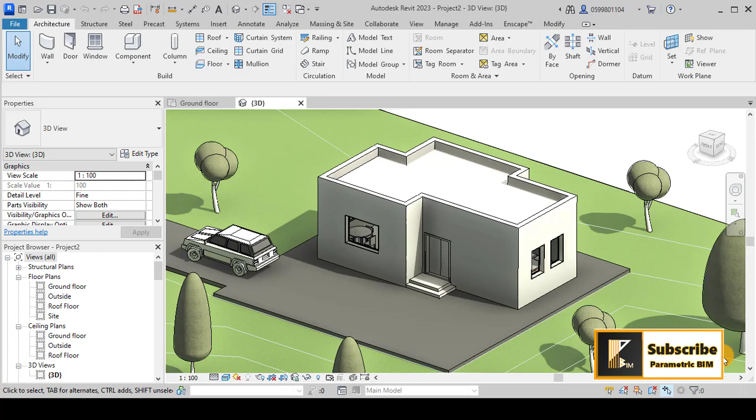Hello everybody, this is Fadi again, and in this tutorial we will learn and continue with this small house. As you remember, in the previous video we have created this small house with the walls, interior walls, and furniture, and also we have learned how to visualize this plan.

So if I am in coarse, it will look like that, and if I turn to fine, it will turn to more detail in the walls and other details that we have in our project.

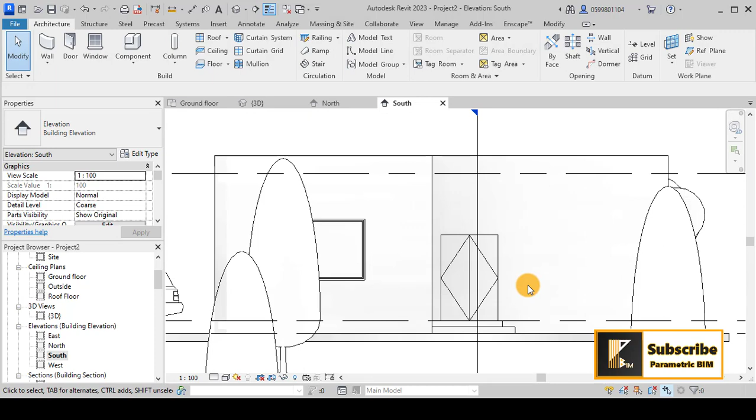So in this tutorial we will learn how to add the stairs, if you remember these. Also in this tutorial we will learn how to create the building pad, or the streets, roads, and also the topography around our project.

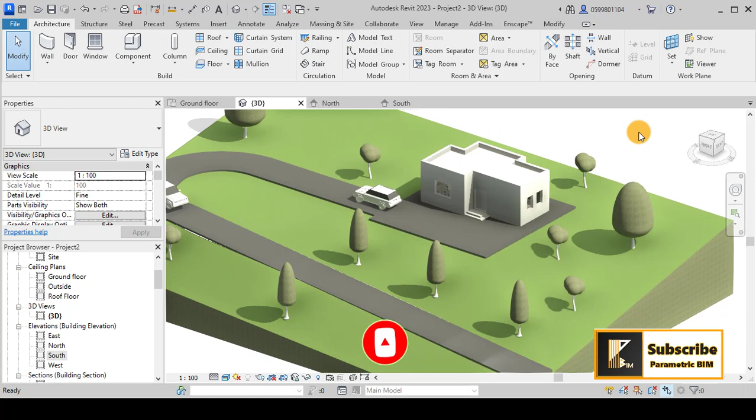So without further additions, let's dive into Revit and see how to continue with this small project.

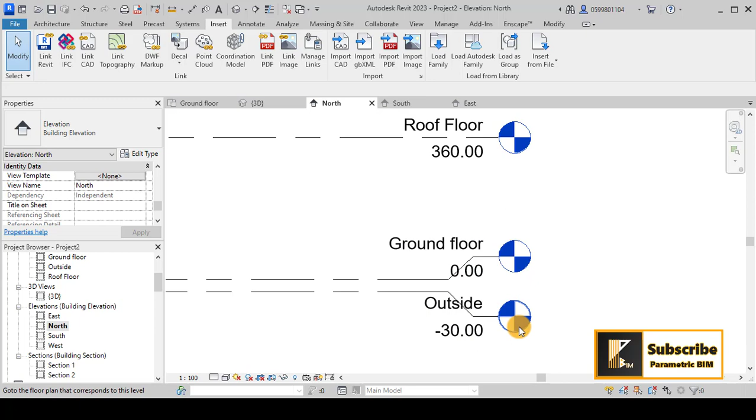So as you see here, I have two stairs maybe at the entrance, as I have two levels with 0 at the level of the home and minus 30. If I go to the elevation, maybe the north, you can see that I have ground floor and the outside level. So in our plan we have two stairs to reach up to the level of our home.

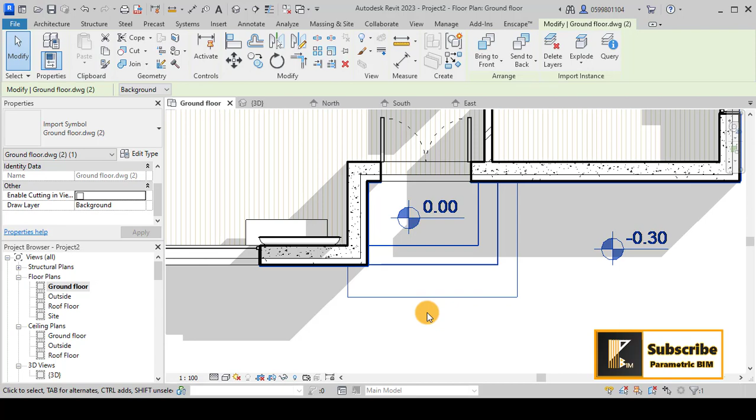And these lines from the CAD file that we have imported into our project template help us continue with this project as guidelines. And also we have two stairs here.

So how can we create these stairs? First of all, I would like to go to Architecture and to Stairs. And also you have two approaches here to create the stair.

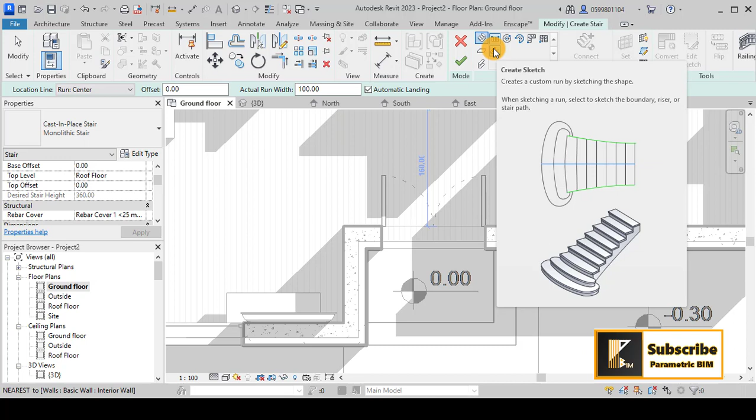Maybe you can create it by sketch, and this is the logic here: you can sketch the boundaries and the risers of these stairs, and then finish this sketch in order to create the stair. Also you have the opportunity to create a run, and then modify this run, and we will go with this approach.

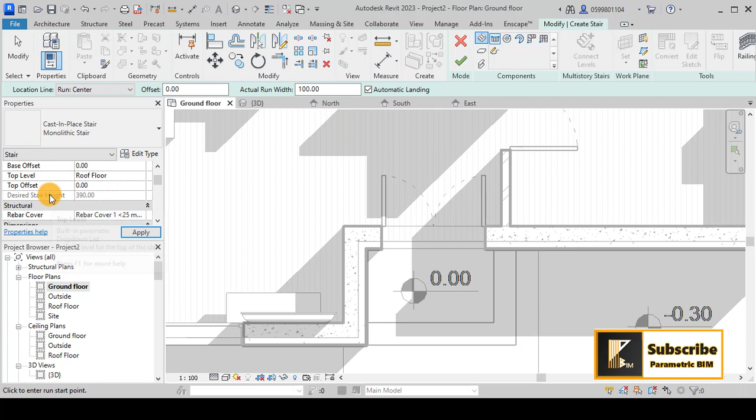So I will select this run and use properties to determine from where to where the stair will be. I will set the base level to outside, and the top level to the ground floor, because the levels go from outside, which is minus 30, to 0, which is the ground floor.

So I will start to draw this stair, and it will give us something like that. But you see that our stair has a custom shape, so simply we can click on the stair, and here above you can convert to sketch.

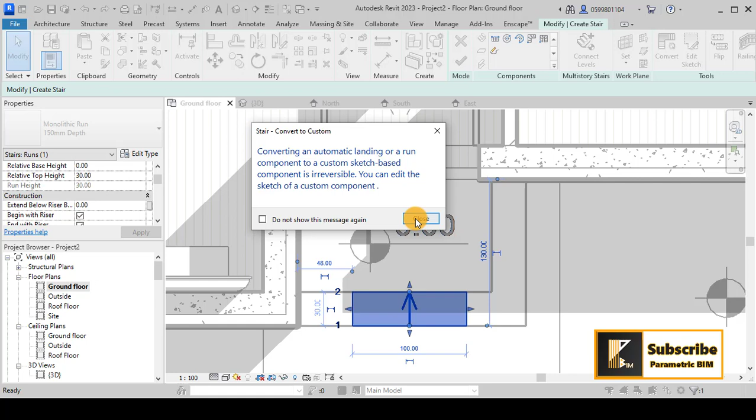This is my preferred approach for making stairs that have not more than 3 or 4 steps. So you will get this message: it's converting an automatic landing. Yes, you close this, and then you go and edit this sketch.

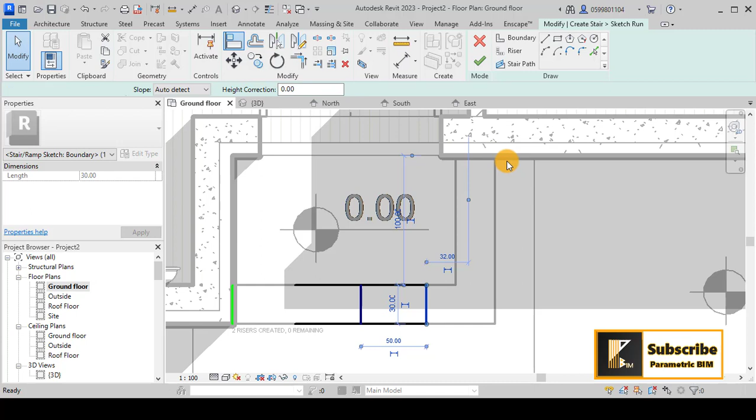If you see, we now have the boundary here, so I will try to drag this to this limit. For this one you can even use the align tool to align this one to that one, but also you can delete it and try to draw your boundaries like that.

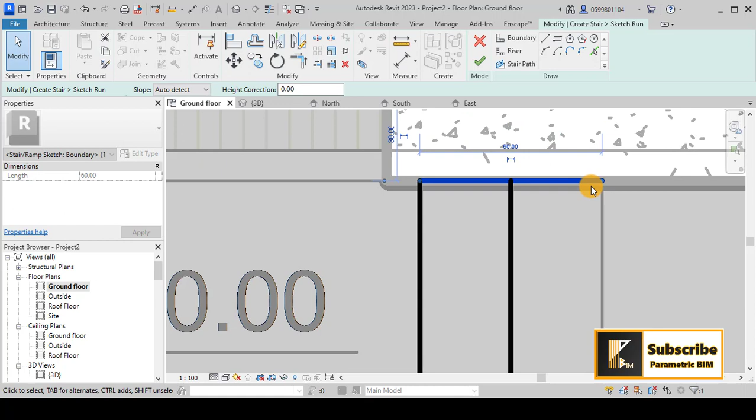Also for the riser, we have vertical risers, so you can go to risers and select these. Maybe the boundary is not here, it will be from here to here, because this line is the cantilever, but we didn't do it.

Okay, now you can trim and extend. I will use this trim and extend to corner to close the riser and the boundaries together like that.

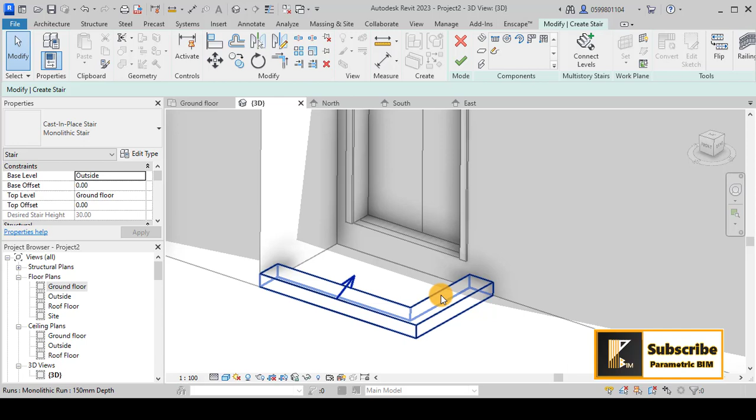And now we have the sketch ready for our first stair here. You can simply click OK and see the result. Maybe in 3D we can see it. Yes, we have one stair, but the other stair will be the landing in this case.

So I will now finish this one and see how to do the landing. You will get this annoying railing; you can simply delete them if you don't want them, and then continue. Now also I will go to select my stair.

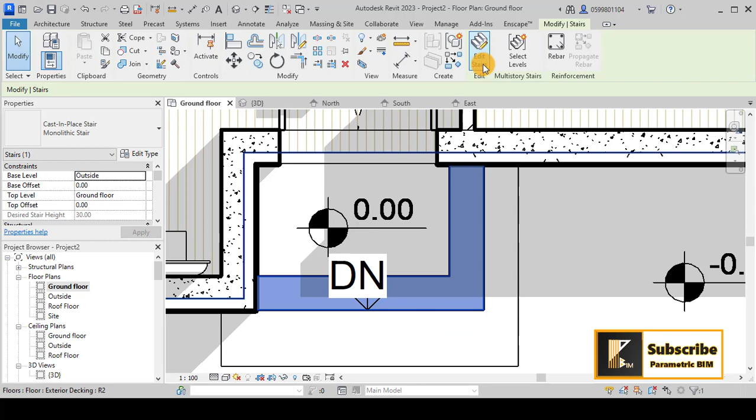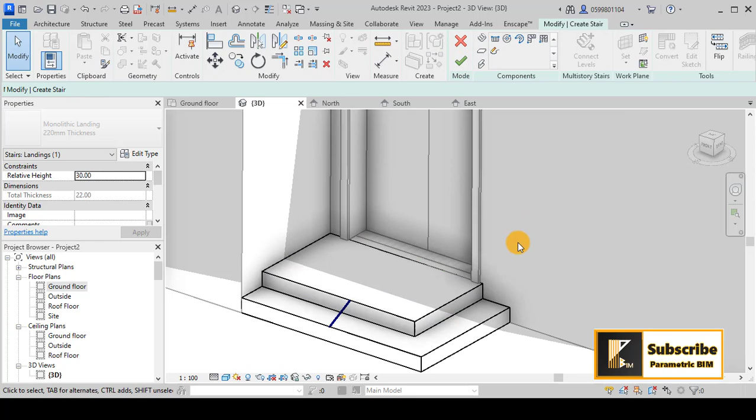I will edit my stair here, and you can see the landing here. So I will sketch my landing because I have a landing here. Once you sketch the landing, your landing will be automatically created like that. Once you hit finish, you will get this result, and this is my approach in creating stairs.

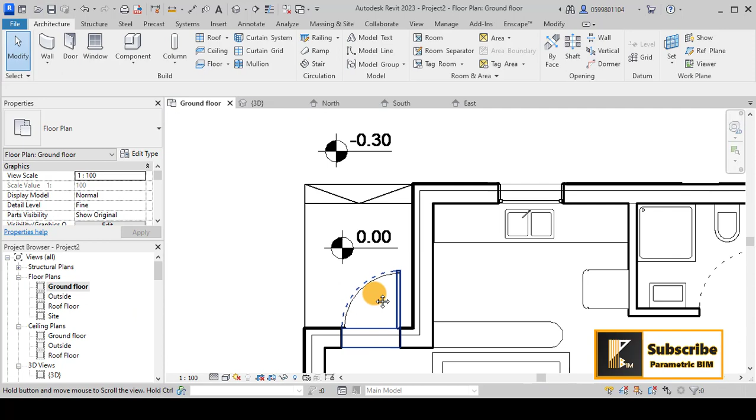If you create a section, you will get a good idea of the result for the stairs. Let's create the other stair on the other side of our home. With the same approach, you can go. Maybe you can also select this stair and create similar ones without any further addition, without going to the options.

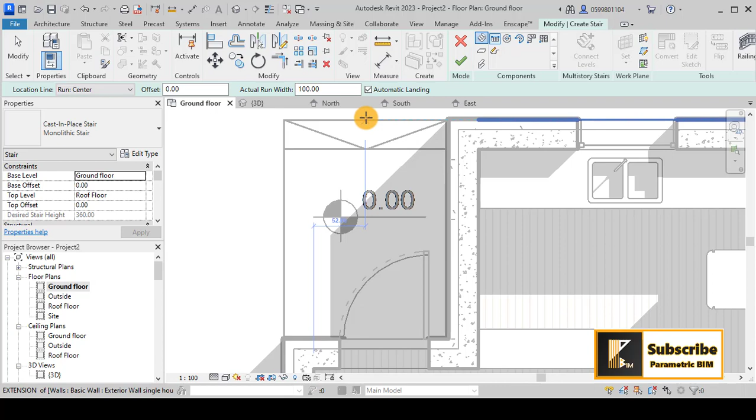So I will use the same approach. I will go to run and try to draw any stair with any type. Maybe you have the opportunity here. There is no need to modify the sketch because it is rectangular.

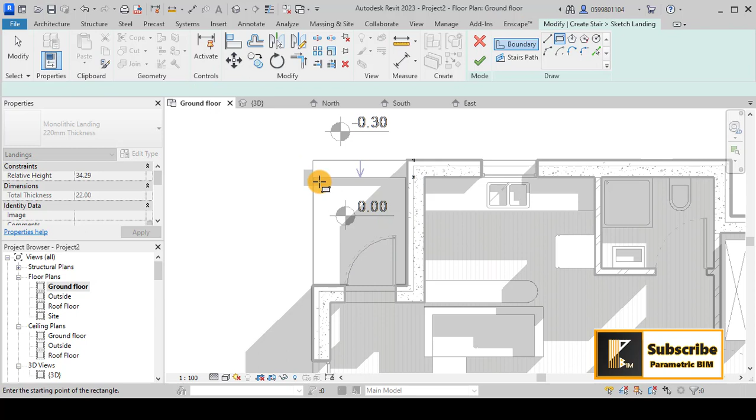So I will now also draw the landing and sketch it. Maybe you can use the rectangular tool here to draw from here to here. You can see now that we have this one. If I click OK, I will get this result. So now we have done with our... maybe we have something wrong here.

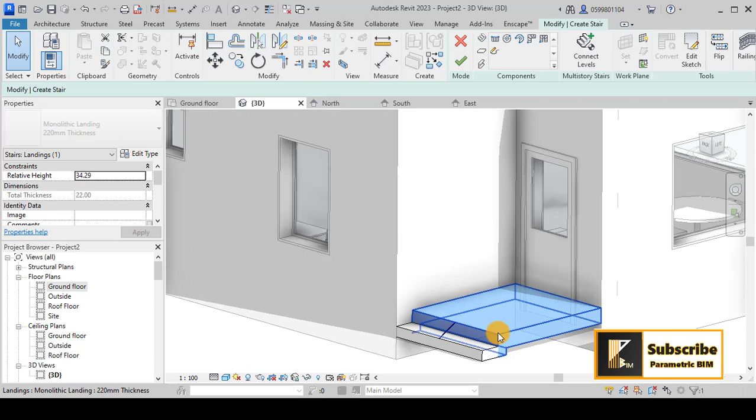I will check now. You can see that if I click on this, I will remove this annoying issue. You can see that the base level is ground floor, but it should be outside, and our top level is ground. So we will adjust that.

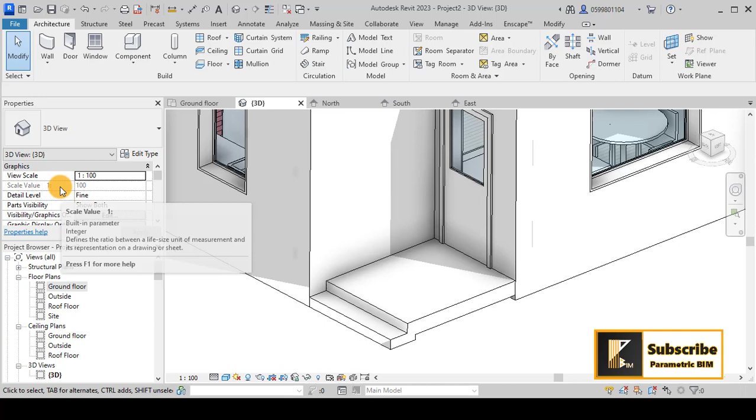Sometimes you can't adjust it like that because you will have some constraints, so you will have to repeat from the beginning and check your properties here, the base level and the top level. So now we have done with our stairs.

Let's try to make some topography now around this house. How can we do that? I will go to site. You have now the opportunity to go to massing and site, and topo surface.

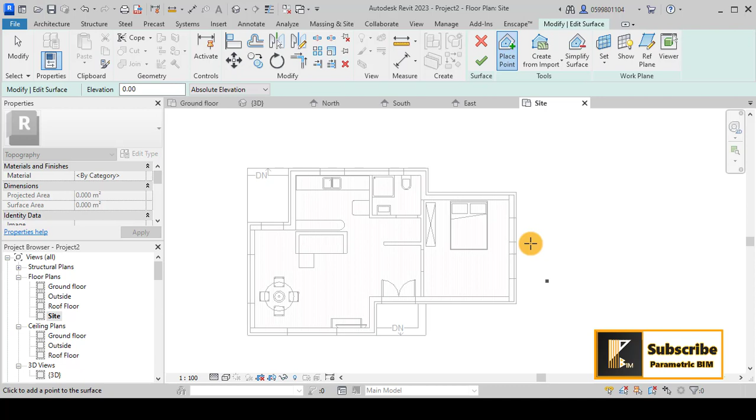By going to the topo surface, it asks us to place points here with elevations in the green tab. Here you can see we are working in centimeters, I think. Maybe. Let's check that. You can press UN and check that the length is centimeter, distance meter. So I will turn to meter, to not be confused. I'm usually working in meter.

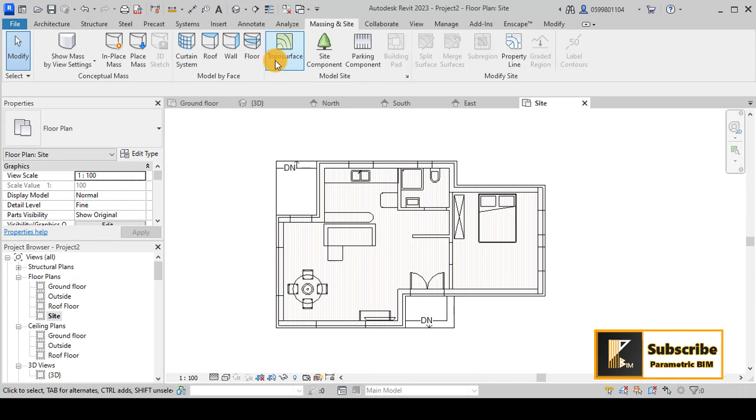It's up to you. Yes, going to topo surface again, and then I will try to put some points. If you remember, we are at -0.3 around this side, so maybe we can go with -0.3 all around. Let's put some points here. Maybe you can move this in order to create a larger site.

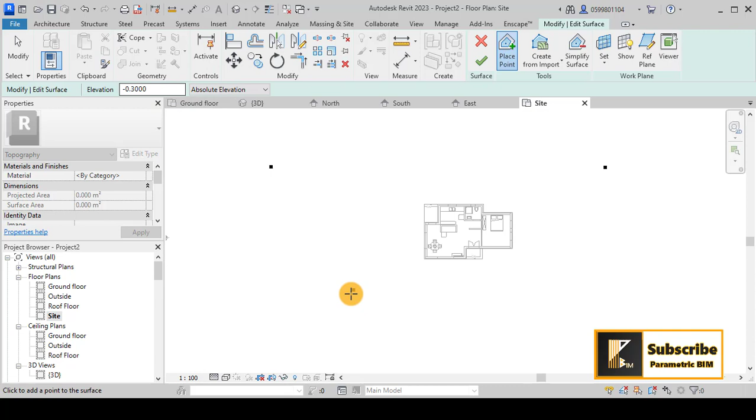Also I will go with -0.3 here, and then I will go with, let's say, 1, like that. Maybe we can go with -5. Sorry, for these two I will use -1.

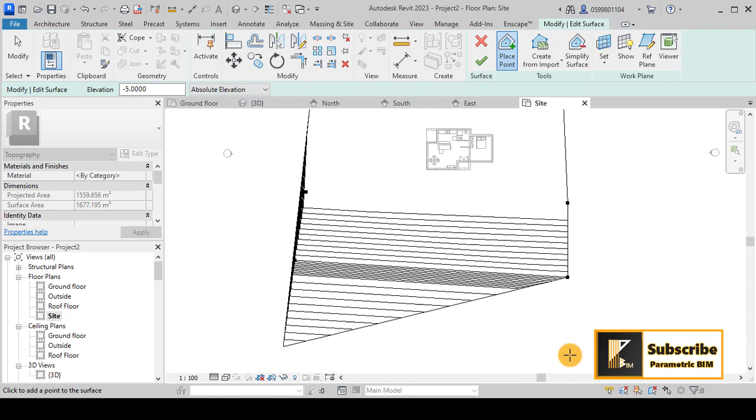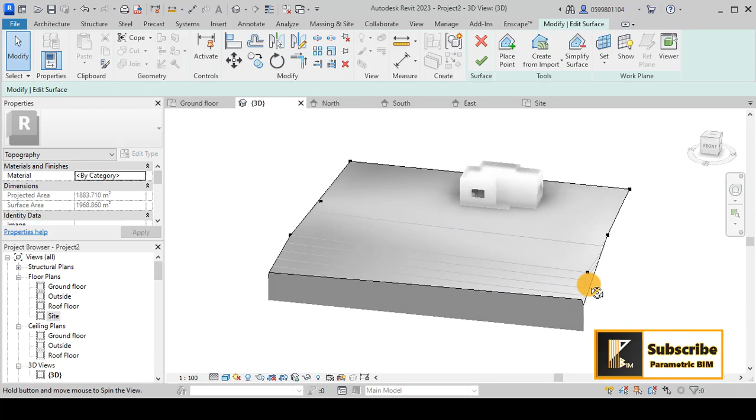Yes, it will not appear because maybe we have some properties here in the view template. Anyway, you can see in the 3D that we have this site. Maybe you can now play with this site in order to get what you want. So I will click OK and see what we have.

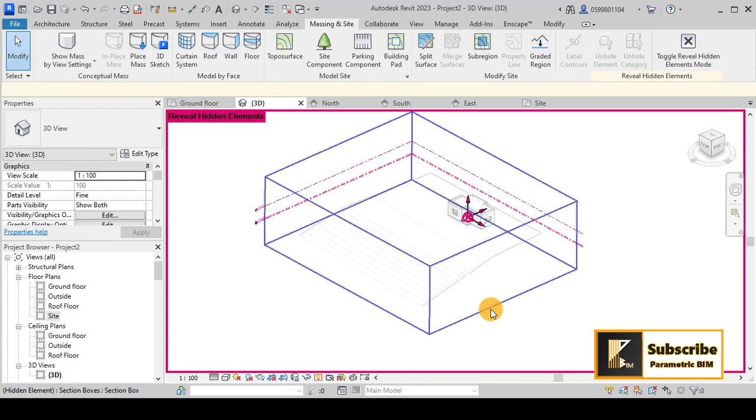Maybe I think the problem is with the section box, because we have hidden it. Maybe like that. You can even unhide this element and then see the result. You can now uncheck the section box in the properties to get the topography shown here in your site. So maybe you can play now and edit this surface.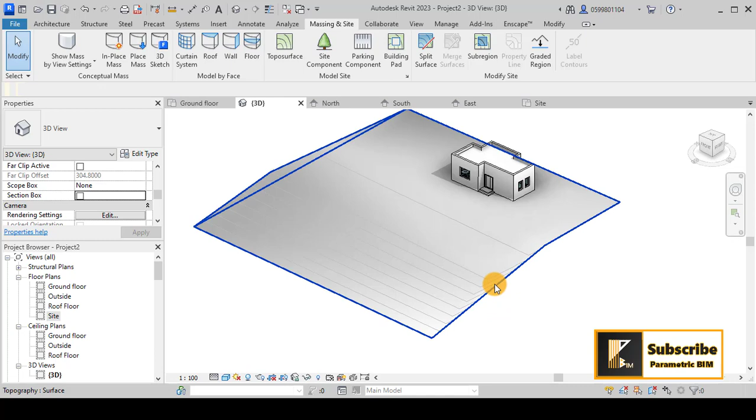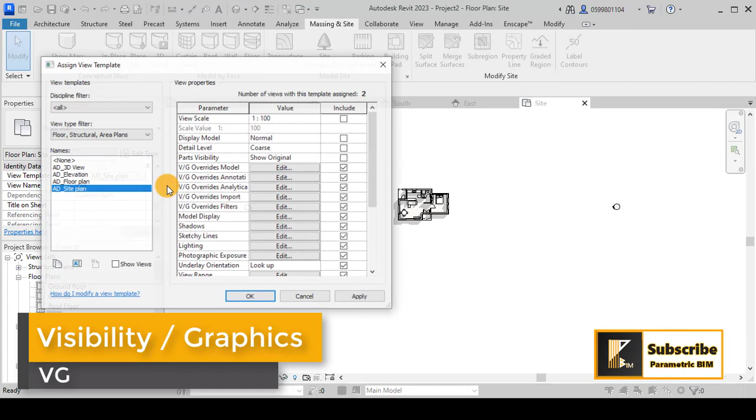Maybe let's say that we have... I don't know why it doesn't appear here. Let's check the view template. We have none here. Let's say we will go to that. Yes, I think with visibility and graphics, we can now play with that to show the topography.

Let's go to model category and go all the way below. You can see that the topography is not appearing. Check this, and now you will have this result that will show you the topography in your project. Let's make some modifications.

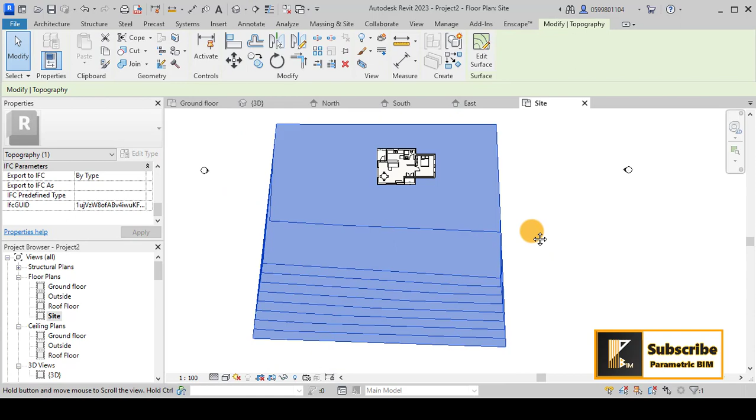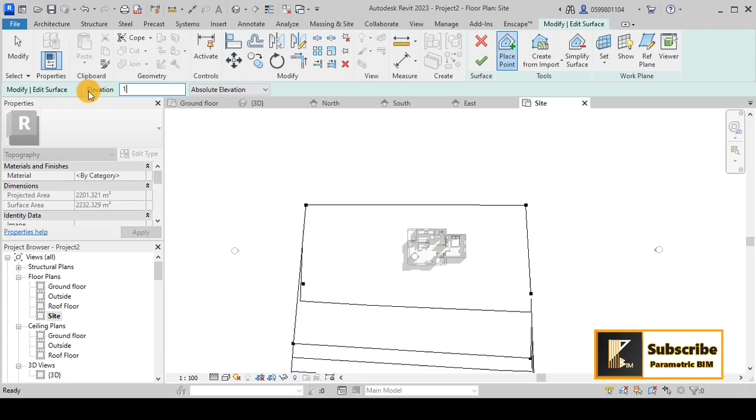I think it's very deep here. Maybe we can make something like that. Let's give -1 here to give some depth, for example, like that. I think we have one here, so you can play with that. Anyway, you can play with your topography. I think we can adjust it like that and like that.

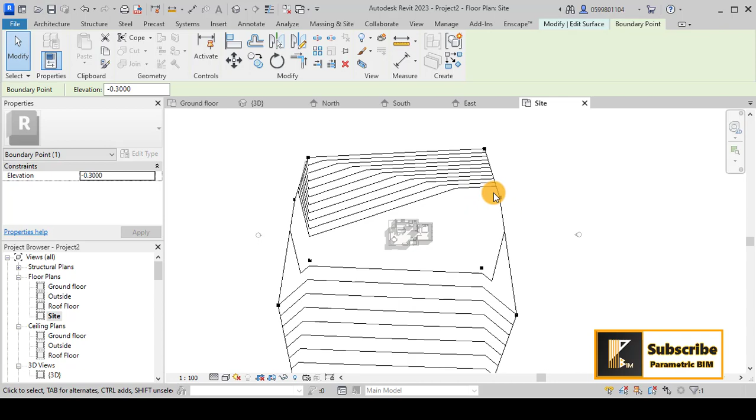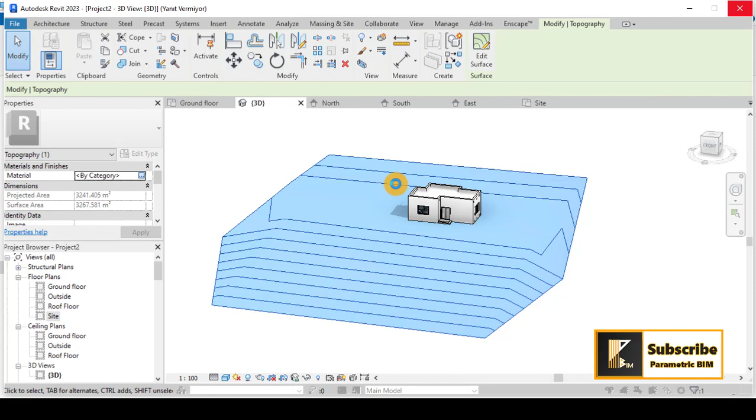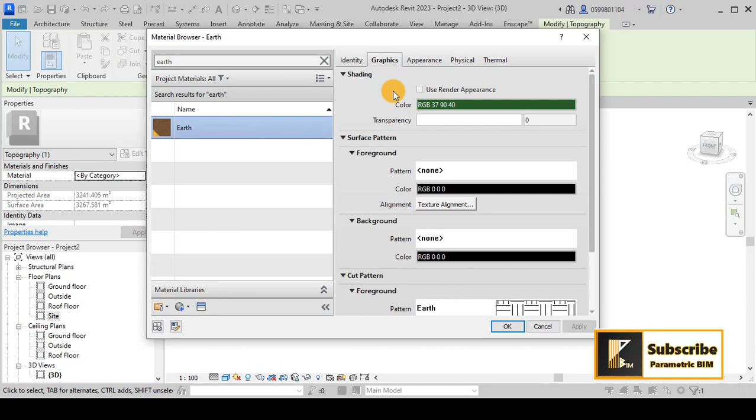Okay, let's say that this is good for us. Some slope. And if you want to change the properties of this topography, you can do that by clicking here and going to the material, and change the material to whatever you want. Maybe we can change it to some green here in order to have the same properties of what we had in the previous video. We can now give, for example, earth for this topography, and for the graphics you can use maybe some green like that.

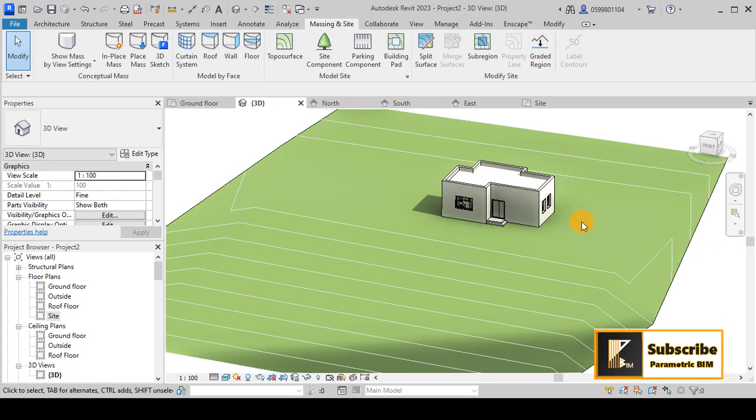Okay, you will get this green color. Maybe you can go to realistic and show that in a good mood. Now we will learn how to create the building pad or some streets if you have them in your project. So I will go now to the site, and now you can go and create, let's say, the floor around this house.

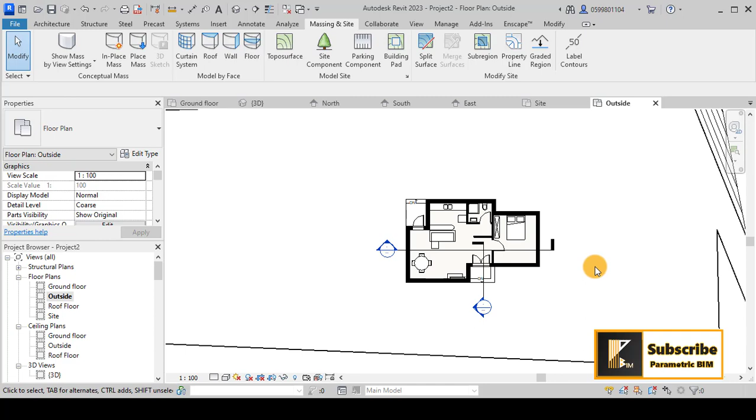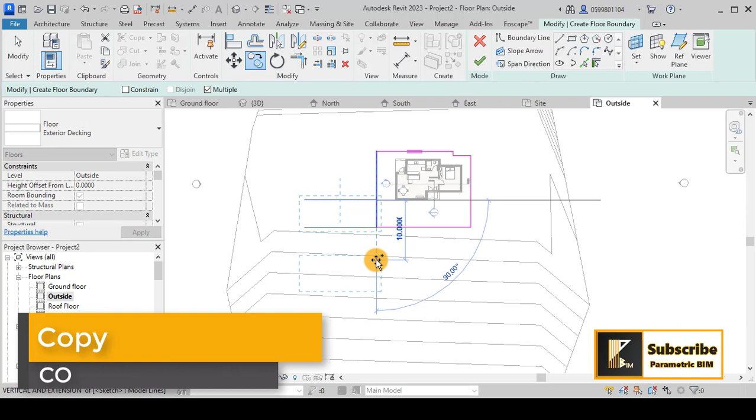So I will go to the outside. Maybe you can now go to architecture, floor, and try making some offsets here like that. Anyway, maybe we can put some cars in front of that. And also I will go in the same one and create some road here, maybe like that, and go with this semicircle, or let's make a copy of these with a certain distance here. The distance you can play with.

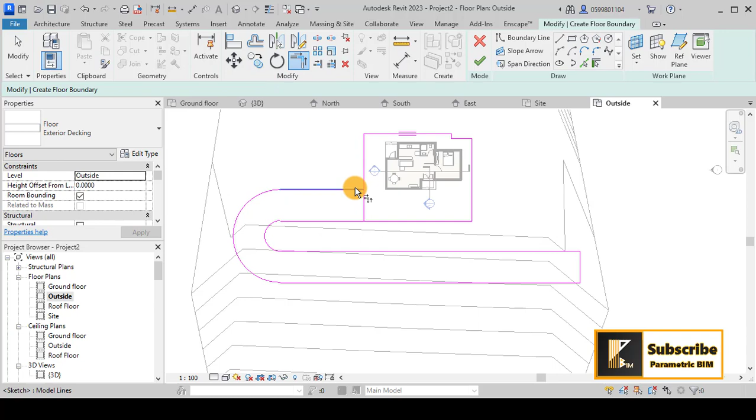I think you will work on the site plan in this case. Maybe make some turning here. Yes, like that. I can choose that and go all the way like that. Anyway, you can close it here and then try to trim and extend these floors. It is just for showing you. So as you see here, I have these.

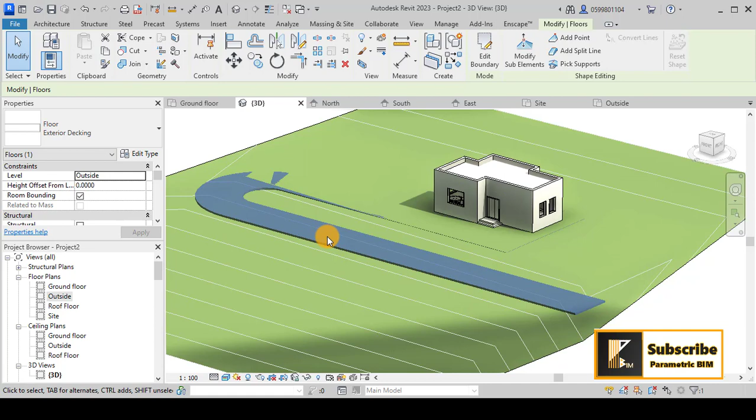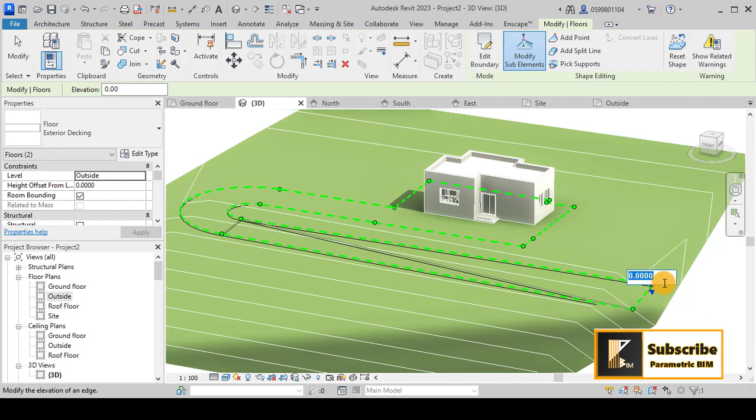So how can we adjust this topography in order to be with these roads? Maybe also you can play with the slope of this road, and I will show you how. If you want to make some modification of that, you will go to modify sub elements, select the floor and then modify that. So I will go to these points. For example, maybe we can put -1, no problem for this message, and also -1 here. I think we make some slope for these roads.

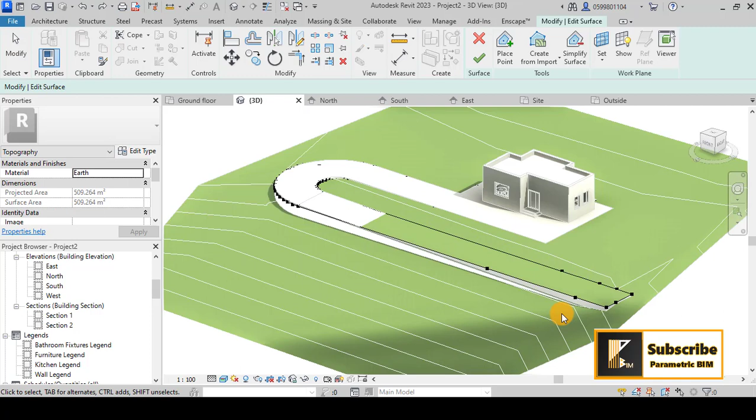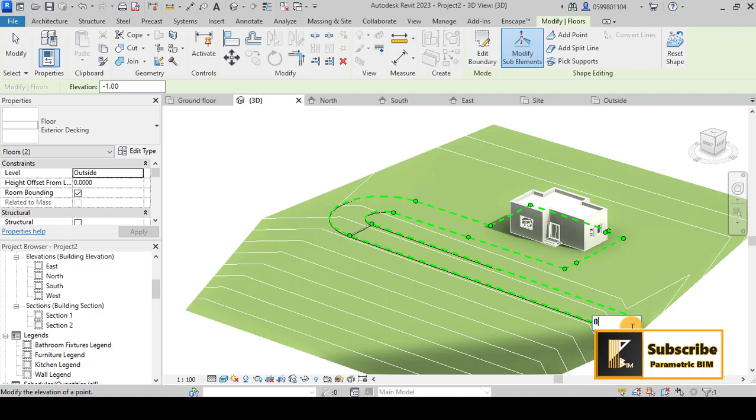Okay, this is the first point that I want to show you, but in this tutorial I will go back with the flat road, and I will show you how you can adjust the topography to your road, and then you will get the point. So I will click Ctrl Z to go with the flat, maybe something like that. I don't know what is happening here. Okay, let's click finish and see what's happening. Yes, I will click OK and then try to make this 0. And for the other one I think we have to zoom here, click on that and give it 0. Yes, we get this flat road.

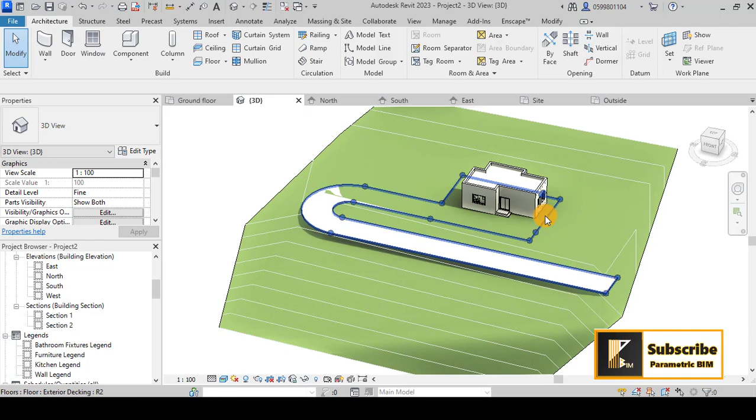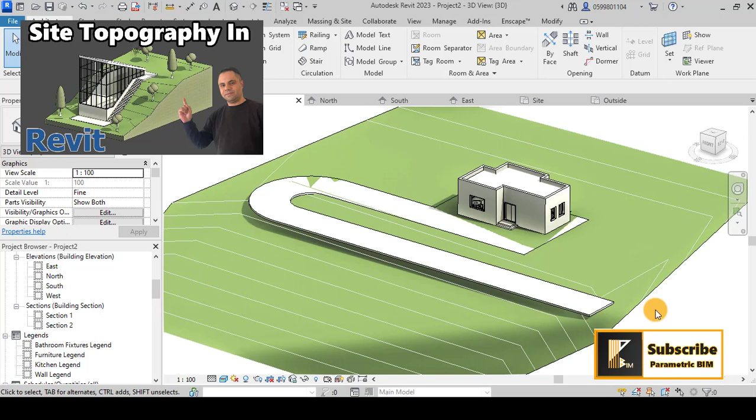So now what is the procedure to adjust our topography to these roads or floors that we have? We didn't make a pad here because we don't have a basement or something like that. Maybe in next videos we can show it, and I showed you that in a previous video, which is the Topo Surface tool. You can check it out in our channel. Now let's see how we can adjust this topography.

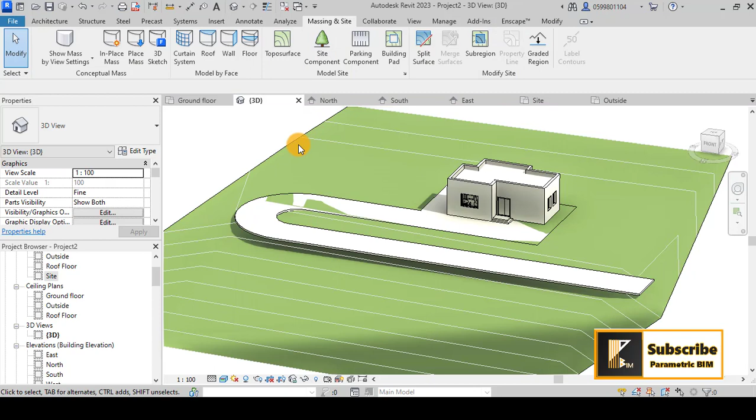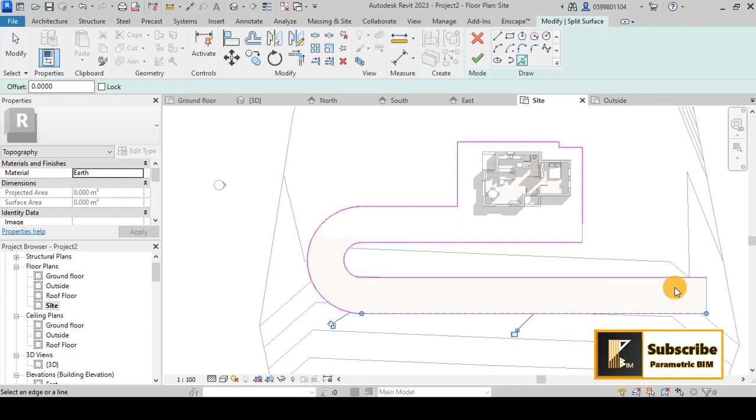I will click now on the topography that we have created. I think we went back a lot, so I will go to massing and site and split this surface. Then I will go to the site. Okay, I will repeat the process a lot faster. Okay, now we split the surface. So I will choose now the surface that we have split. Yes, this one. And then I will go to edit surface.

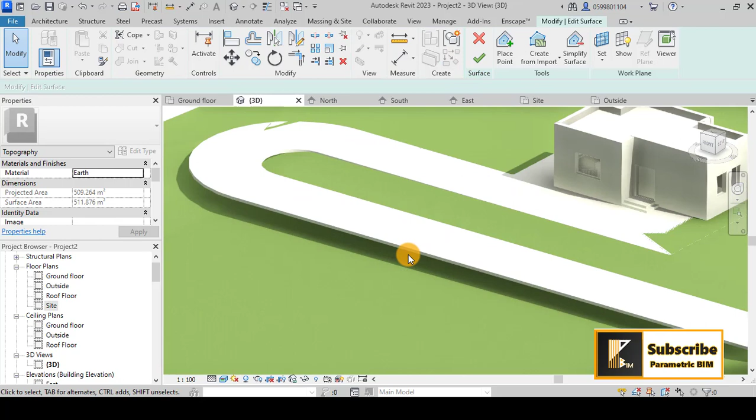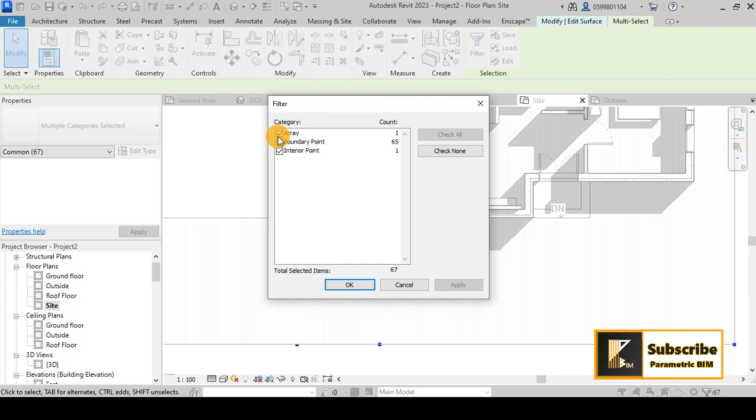Now we know that our floor thickness is 20 centimeters, so from the site you can choose all the points, and then I will go with the elevation, but here we have selected something like that. I will go to filter and uncheck the array. This is the array of the table, if you remember, and then for the elevation I will go with minus 0.5.

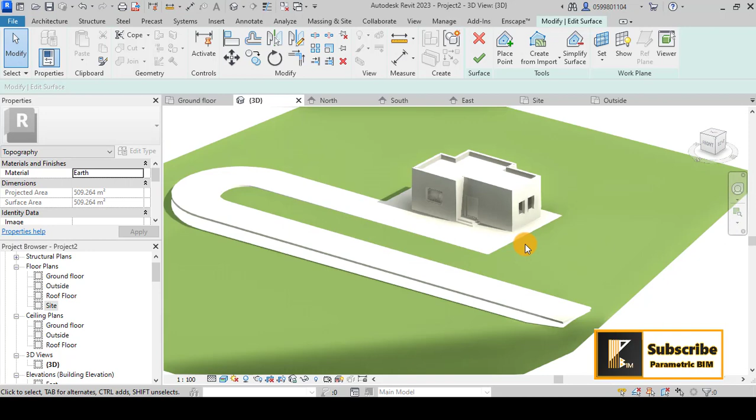Why minus 0.5? Because I want the surface to be a little bit below, let's say, the ground. So now we have adjusted the first one, which is the split one. Maybe you can also remove it, but in order for it to appear in the section you have to leave it.

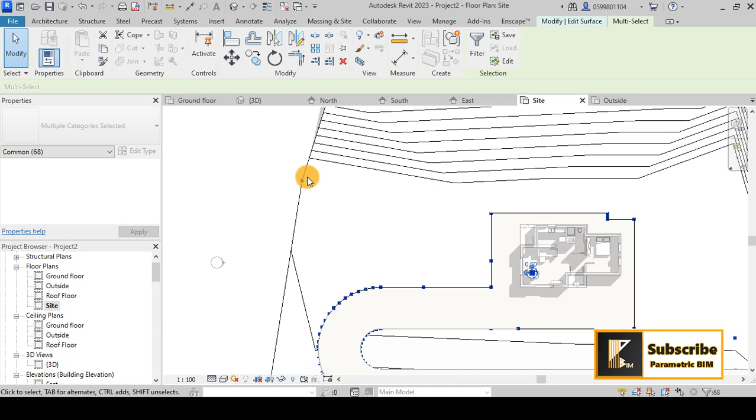So I will finish now, and for the other one we also have to select Edit Surface and then go to the site. Let's also choose all of these. Maybe some of them will be chosen that we don't want, so there is no problem. You can go to Filter, check none, and check the boundary points only, not the interior points. You can click OK, but this sometimes doesn't work,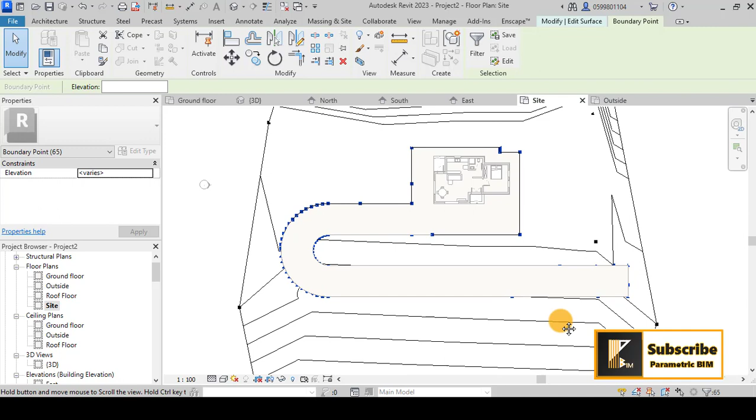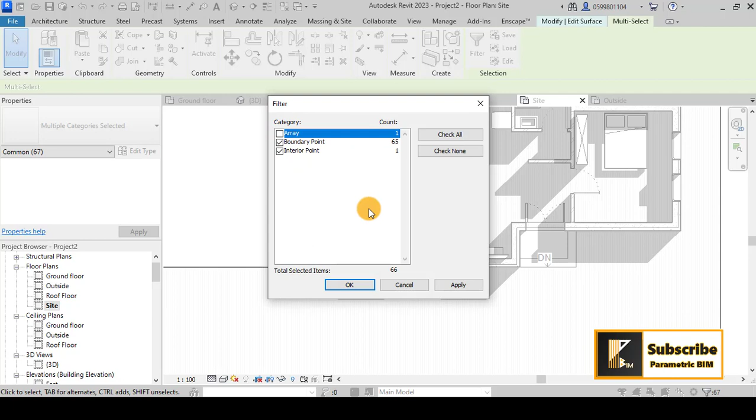so you have to make sure that you have selected just the boundaries like that, which are the boundary points between the surface and the road. So I will go one more time to the site and try to select that. The array will also be selected, uncheck that, and click OK. We have these points. I will also give the elevation minus 0.5.

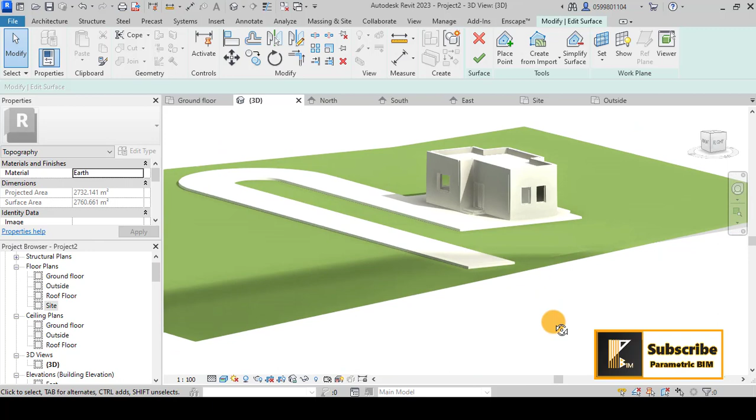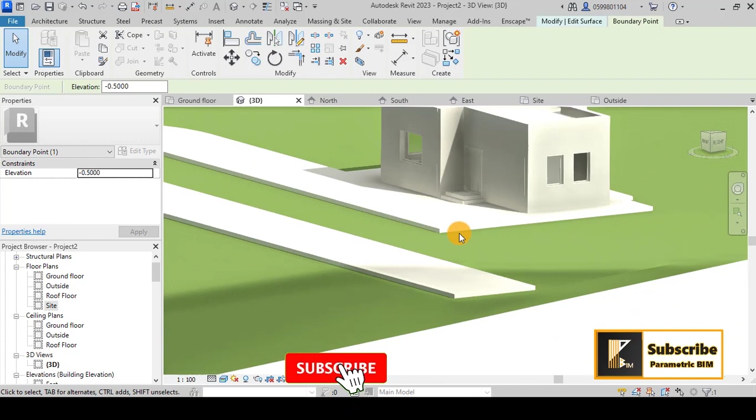Let's see in 3D what we have. Yes, we have adjusted our topography to the road that we have created, and the points will be below the floors because we have given the elevation of 0.5, which is the 0.3 from the ground because it is the project base point, and also the 20, which is the thickness of the floor. So this is the way you can adjust your topography with your floors and external floors as we have in this example.

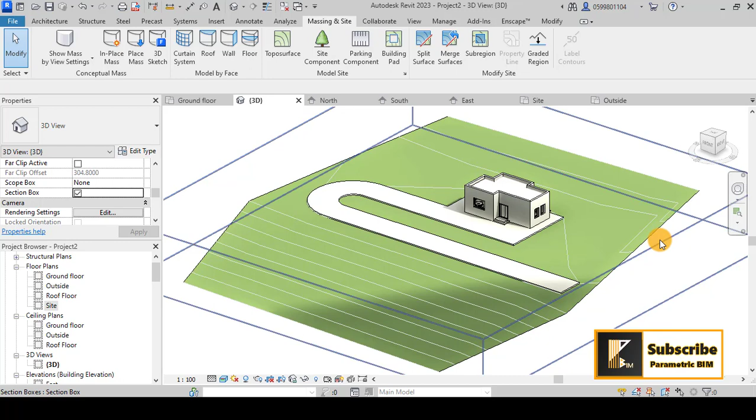Once you finish, you can finish this one, and let's try quickly to represent that by choosing the section box, and it has not appeared. Yes, it has appeared now. So we can represent that as I showed you in previous videos, like that maybe, and also here like that, and from here you can also drag this to this point.

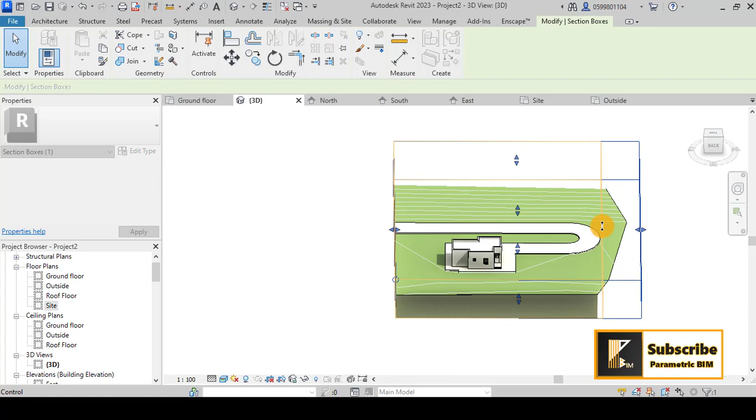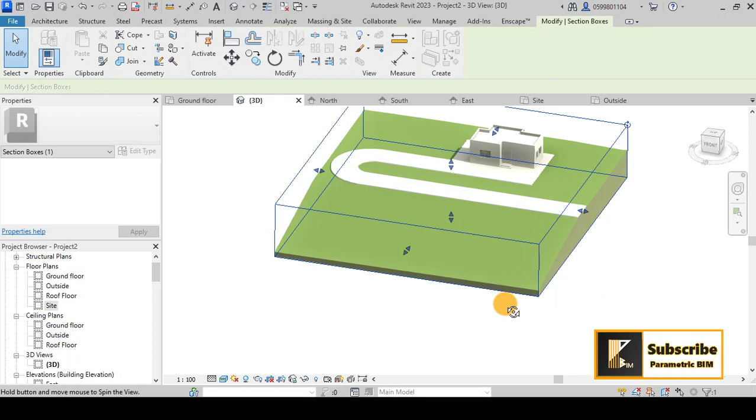Maybe we have to adjust the topography a little bit here to have some extension here, or you can come from here all the way to have this representation. And from the front you can also play with that to have this representation of the site. Just simply right click and Hide Element in View, and you will get this representation of the topography and our small house. You can even now add site components from Massing and Site, such as plants.

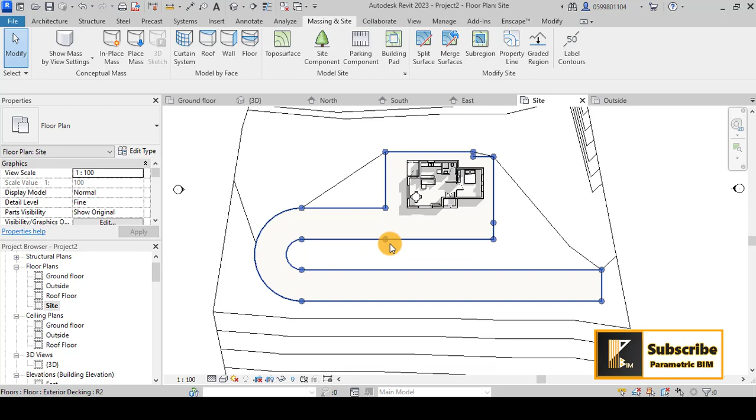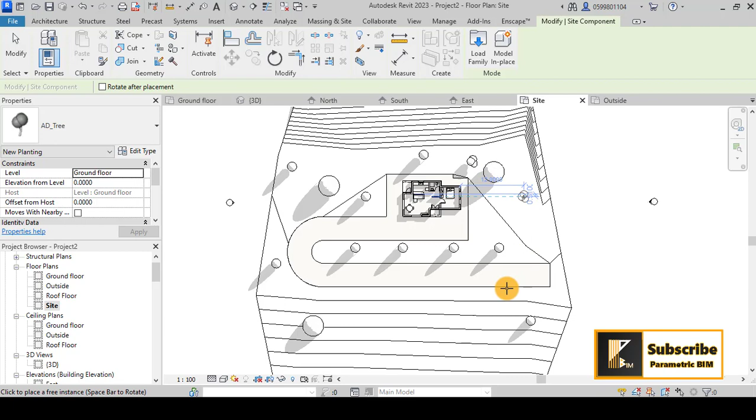If I go to Site and go to Site Components, you can add some, let's say, trees, or let's choose another type of tree like that, smaller trees all over the site here. Maybe you can make some design in your site plan like that. Choose another type or family of site component. You can even add maybe some cars here, if you have a car space, rotate it like that, and we can see that in 3D.

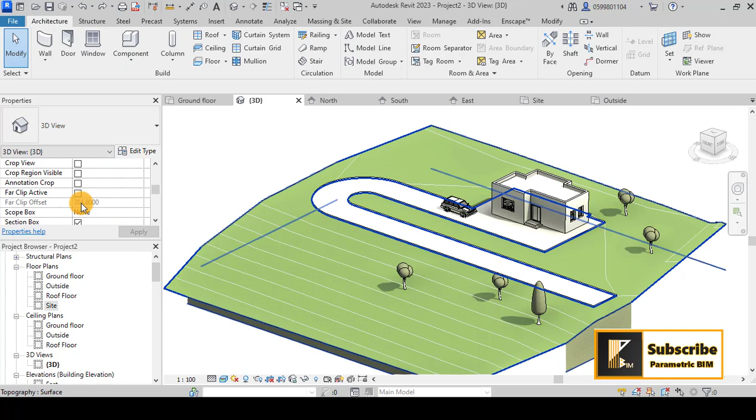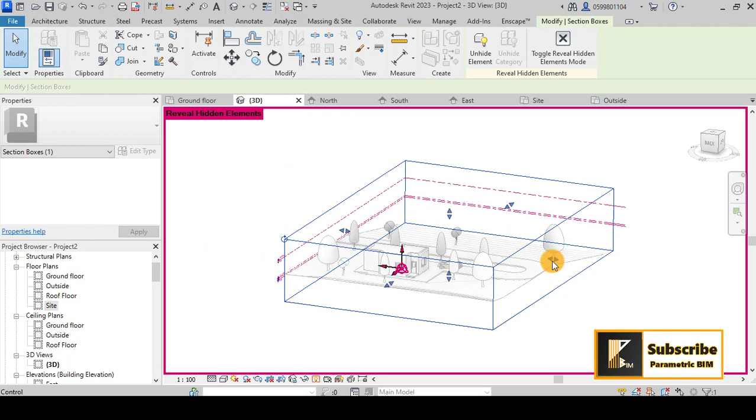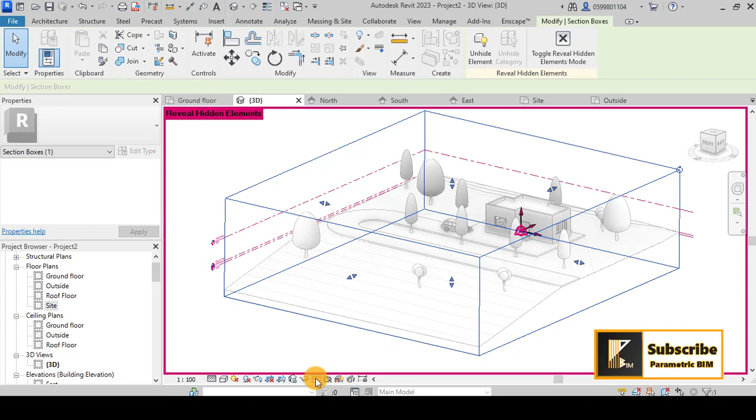But the other trees did not appear, I think because of the section box. I think we have to uncheck it. Yes, we unchecked that. And we will try now to repeat the process to represent our topography as we want, like that. You don't have to uncheck that, you just have to unhide it and play with it, because as you see our trees maybe were taller than the section box, so you have to move the arrows a little bit like that, and then you can unhide that. I think everything will be okay.

So this is my approach to how you can adjust the topography. Now if you make any section, you can get the earth below the house. So this is too much for this tutorial. I think you have sufficient information to get started with Revit: how you can construct walls, deal with furniture, topography and roads, components, site components, and much more. This is the basics to get started with this small house. In the next videos we will go into more detail on dimensions, stairs and other components, columns, and how we can construct, let's say, shop drawings.